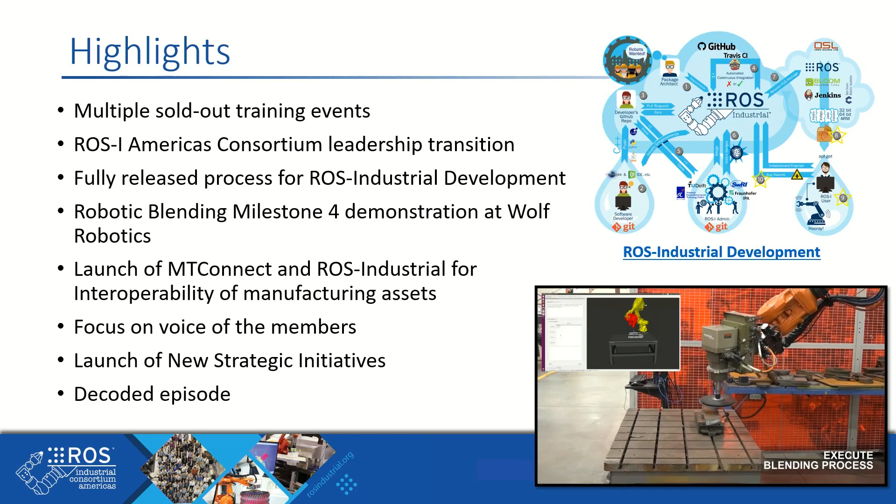All right, perfect. So we'll just step through a few highlights of some of the things we're working on. Training is also a focus for us. We're typically selling out events, so we could deliver more. I think it's something we have to look at carefully and figure out how to increase our bandwidth. We have a lot of interest not only from industry but from universities as well. So collectively, with Europe and the U.S. sharing best practices and content, I think we can go further faster. We did transition our ROS-Industrial Consortium leadership.

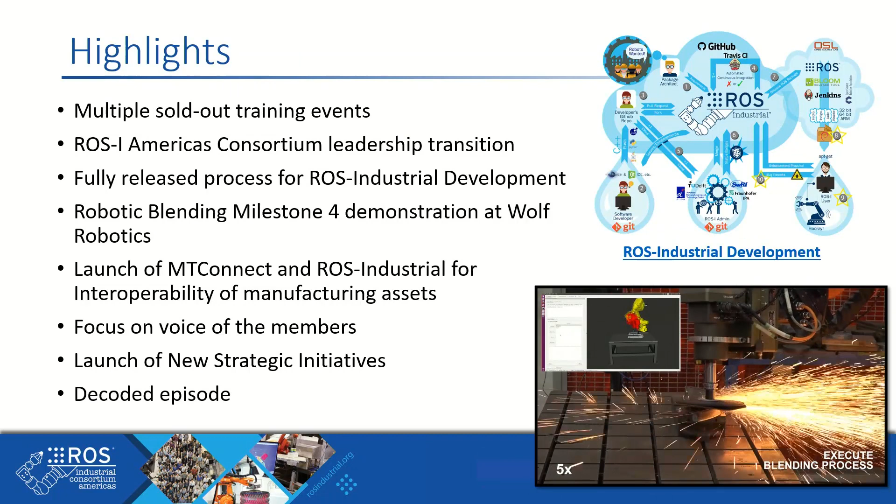Many of y'all may have met a couple of our former leaders, Paul Hvass and Shaun Edwards. They're working on a startup company that heavily leverages ROS capabilities, and we're excited to see where that goes, and it will be an example of something we can point to in the future.

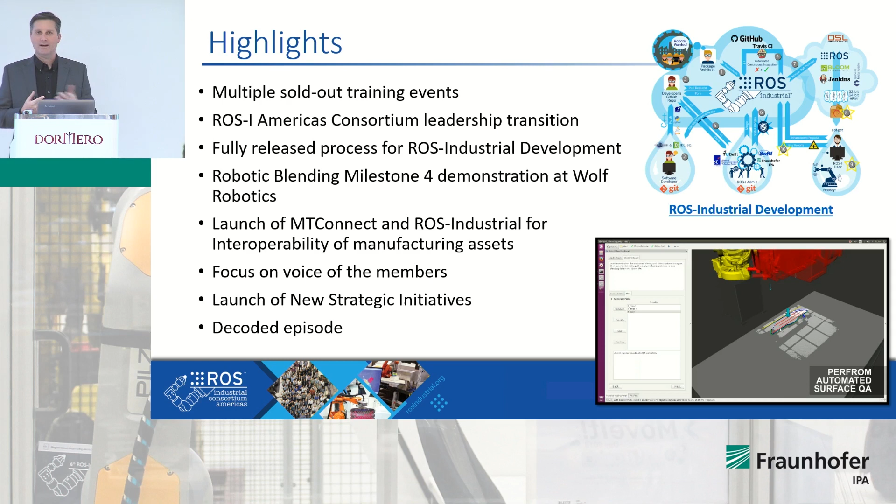In the meantime, our new consortium leader in the Americas is a person who came to us from Caterpillar, who was in their R&D group for advanced manufacturing. He was a heavy user of ROS in their labs, and so he's hit the ground running, so to speak, and really been a champion for what we're trying to do relative to ROS-Industrial and also the coordination with Europe and Asia Pacific.

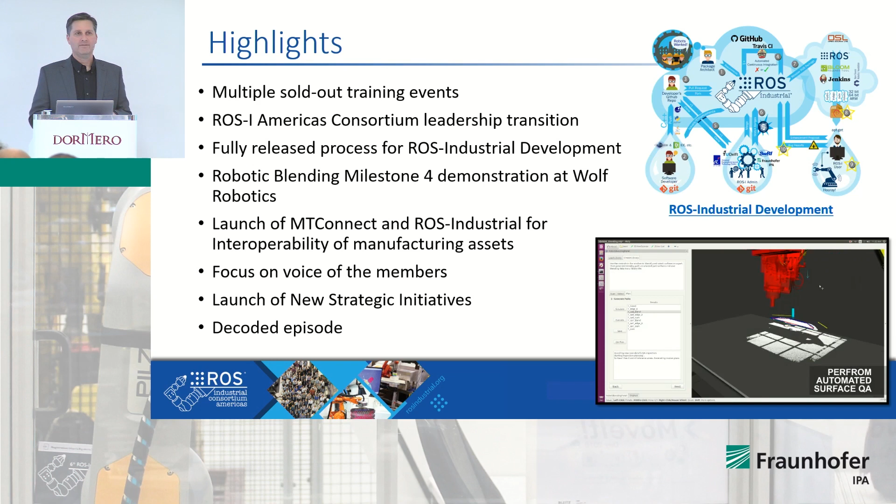Supporting Matt is also another gentleman named Levi Armstrong. He comes to us formerly from Bell Helicopter, and he's supporting Matt heavily on a technical role, while Matt is more on leadership and business. They regret they couldn't be here today, but I expect you'll see them again in the future.

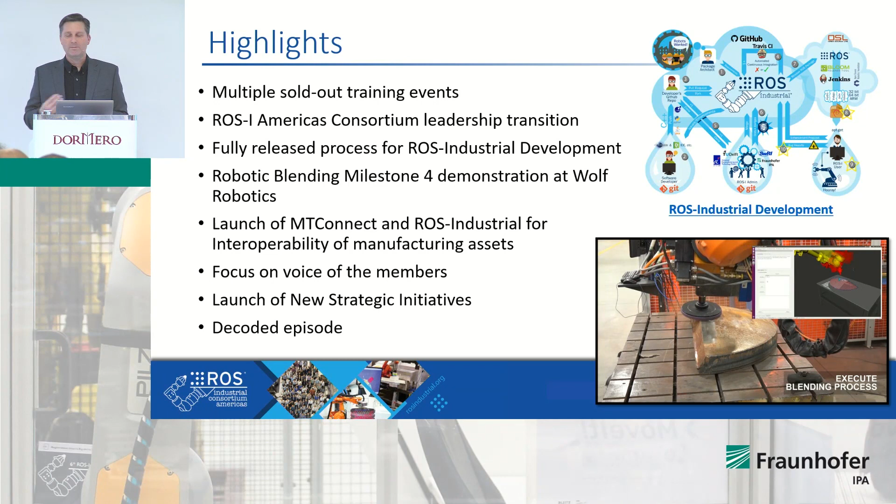One of the things we'll talk about here in a few minutes too is we accomplished what we call Robotic Blending Milestone 4, with a real tangible demonstration at an integrator facility. We're looking forward to rolling that out further. We've also been working on a bridge between MTConnect, which is a machine tool standard on communications and cloud connectivity, and ROS-Industrial.

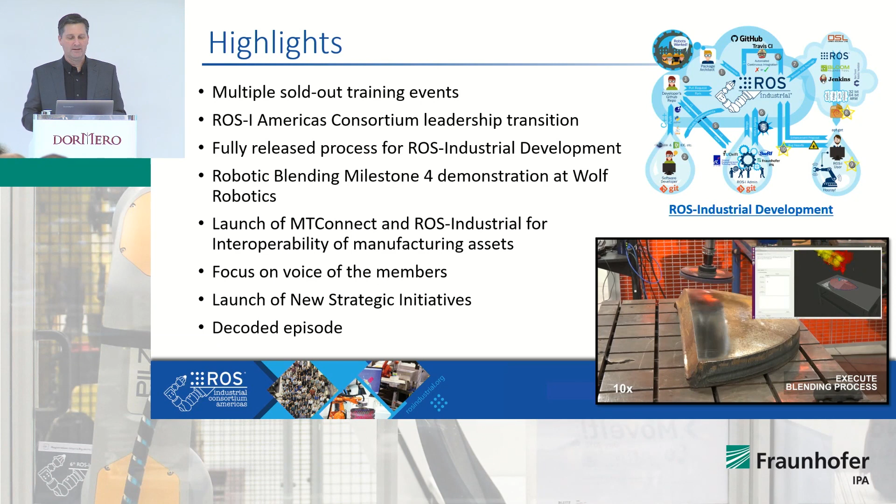We've focused on listening to the voice of our members, their priorities and interests, and how we start to solve those problems or challenges. Some of that is through new strategic launches of projects and capabilities. And then we'll touch base on the Decoded episode that just came out.

So first of all, voice of member. One of the things our consortium leader did when he came to us from his position at Caterpillar is he started looking at what the members are seeing as value out of ROS and ROS-Industrial, and then what we do as a consortium to offer some of the benefits back, in a stronger way, to those organizations and individuals participating. So I'm just going to highlight a few of the items we're focused on, not all encompassing.

Some of y'all may be aware that in the Americas we've launched recently what's called the Advanced Robotics for Manufacturing Institute, called ARM-I, and that institute is part of this network of institutes for manufacturing innovation. One of the things we're working on is how do we coordinate and complement this new institute, and one thing we're working on with them is how ROS-Industrial can be a central theme or maybe a repository for a lot of the good work that will come out of that institute.

We've heard from the customer that they're interested in access and alignment with universities, students coming out of universities. They need more skills in this ROS Industrial and ROS area. So we're working on coordination with universities on how we build that talent pipeline.

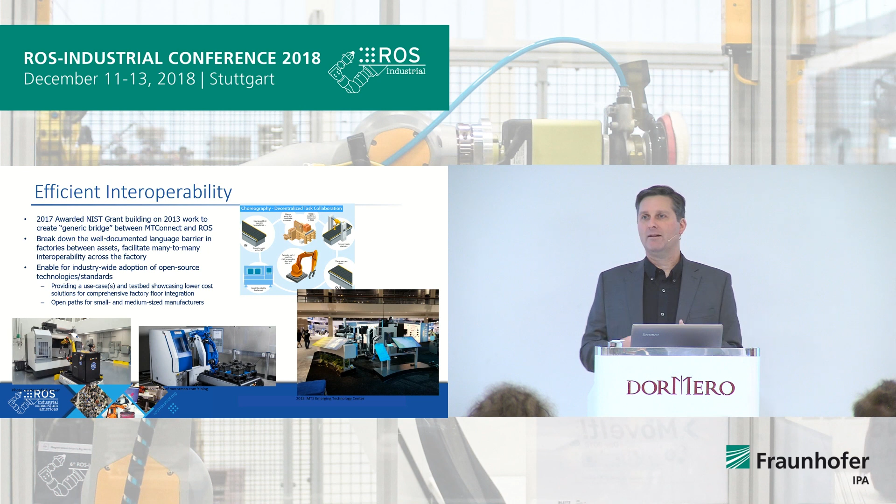And quick deployment. So one of the things we've worked on to help address some of this is looking at whether there are standards we can start linking to, and have a tighter coupling between ROS Industrial. MT Connect was initially machine tool connectivity for your machine tools. It's been expanded, as far as that working group, to be something more about factory connectivity, not just machine tool connectivity.

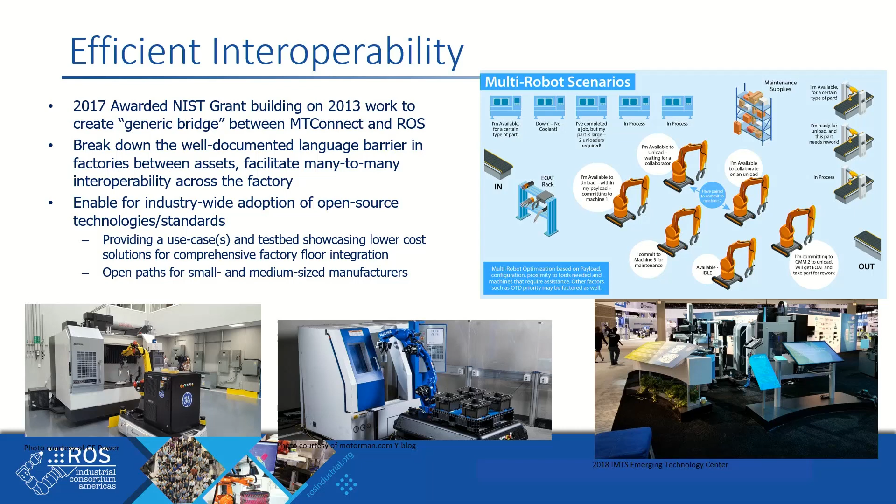So one of the initiatives we've been working on through the National Institute of Standards and Technology is building a generic bridge that links up to MT Connect, starting to offer broader connectivity between automation equipment and other things like machine tools and coordinate measuring machines. We start building out this capability of many-to-many connections on the factory floor between lots of different pieces of equipment.

There is an MT Connect repository on GitHub, and you can go there and see a bit more about what's going on. And on the blog, the ROS Industrial blog, you can read multiple blog posts about the progress on this initiative if it's something of interest.

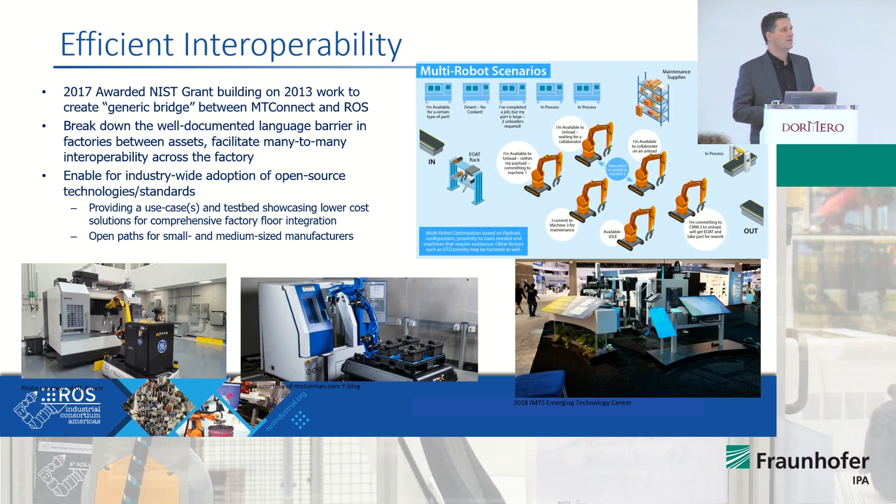Also looking at strategic initiatives, there's been interest from the Americas—I don't know so much about a request from Europe or Asia Pacific—to start understanding better who's doing what. So one of the things we've started to put together is this notional, I'd call it an organizational chart, but that might be too strong a term, this idea of identifying who does what within the ROS Industrial Consortium on the leadership, not only fostering the consortium itself and supporting the members, but also on different capabilities, different technologies, different core competencies within the software development framework.

So I realize that's like super small.

These slides will be available later so you can look at it with a sharper eye. So that's what this represents up here on the top right corner.

We're looking for others to add to that list. Coordinating with Mirko or with Matt Robinson are good ways to start looking at how to add yourself to that list, because you're shepherding a core part of the capability within the ROS Industrial Framework and want to be responsible. We're looking for that kind of initiative, that kind of volunteer.

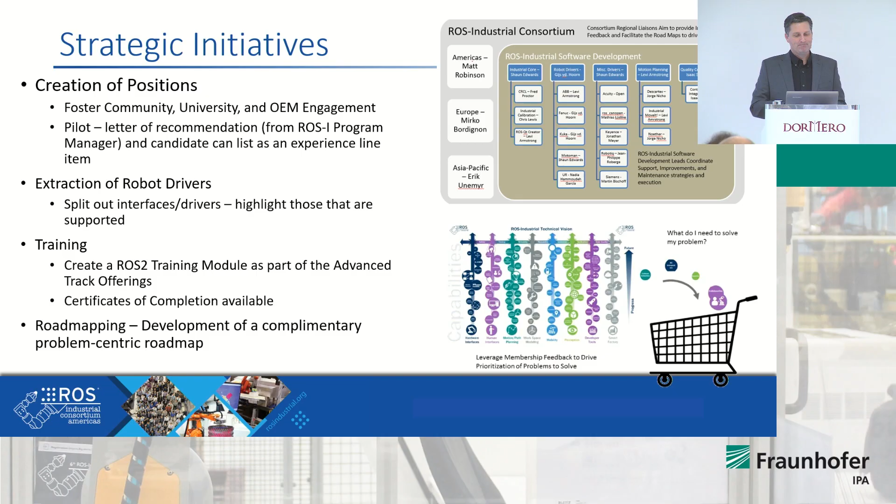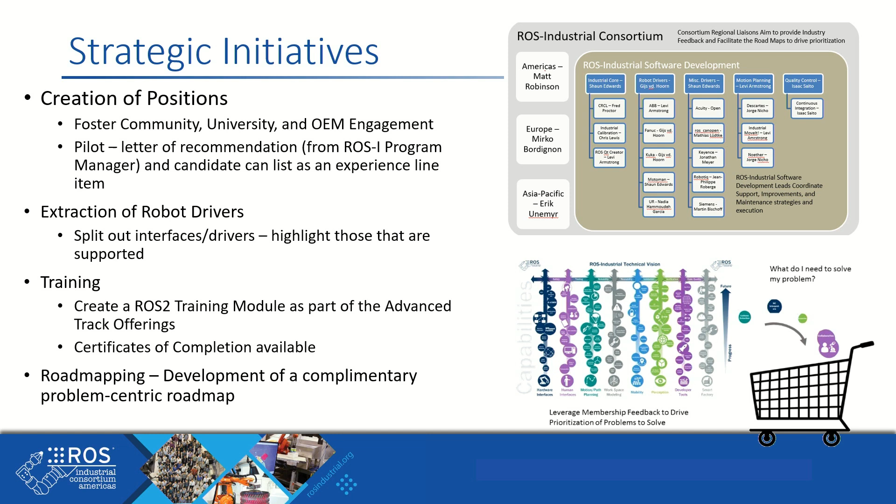The other thing is that we're looking at highlighting in a special way those drivers, those original equipment capabilities that are tighter coupled to ROS Industrial and to ROS. So basically recognizing that there's something maybe supported by an original equipment manufacturer versus something somebody put up on the web that maybe isn't very mature. We're looking to highlight those with more maturity in a special way.

We also recognize it's time to start moving towards a ROS-2 training module in the Americas, and we're looking forward to leveraging what's occurring in other parts of the global community relative to ROS-2 training as we begin to prepare our journey on that as well.

The last thing I'll mention on strategic initiatives is there's been a request from industry: the roadmap's great, has anybody seen the roadmap for ROS Industrial? It's on the website and also in a brochure. A few people said okay, I think it's great, it's got a lot of capabilities and it's really well laid out.

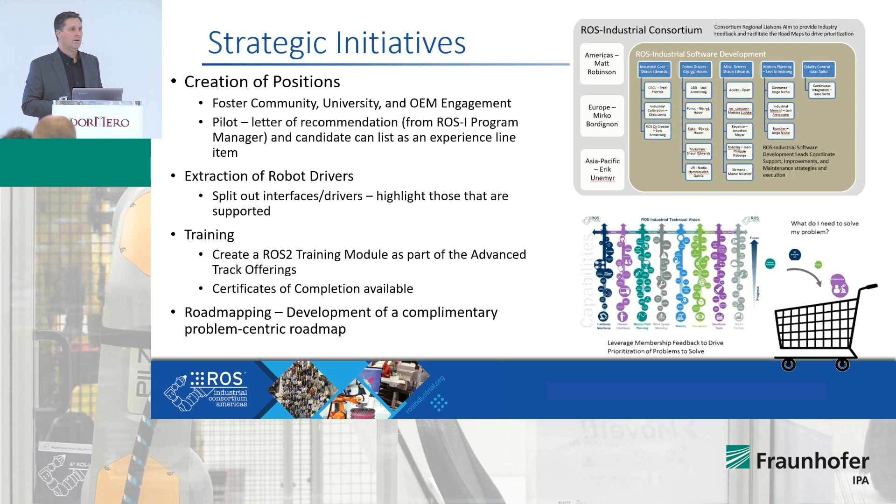But the challenge industry has had is that really they want to try to solve some problems. So if I want to solve a problem, I want to grab different parts of this roadmap and put them in a shopping cart, so to speak, and be able to use those. So as we think about the timeline and priorities for the different elements on the roadmap, it'd be good to also think about the problems industry is trying to solve relative to those elements and their priorities on those problems. It's a different way to look at the roadmap. We're starting to craft that viewpoint over the course of this next year, so look forward to seeing more about that.

Community engagement also remains a priority for the Americas. There's items as far as events, too numerous to mention. I'm just going to highlight a few that are of interest.

One is that we had a number of requests from the startup community asking to create a special category for them within the consortium. So within our agreement, we did add that as an opportunity for startups to be better recognized and also have a better opportunity to come in and engage with the consortium.

We've also been fostering what I would call meetups, which is basically helping organizations or individuals understand how to bring together a community of interested, like-minded roboticists in their area to try to create some synergy within a certain geographical region. We're also doing that in San Antonio in collaboration with the Plus One Robotics staff, Shaun Edwards, helping us with that too.

World MoveIt Day was one of our highlights over the course of this last year. We loved participating in that, seeing a lot of the great progress, and we were inspired by it, so we launched the World ROS-I Day. Over the course of about 22 hours, we solved about 31 different specific issues that were recognized, so we call that a success. We're on deck for keeping that alive and doing it again, so look forward to announcements on that in 2019.

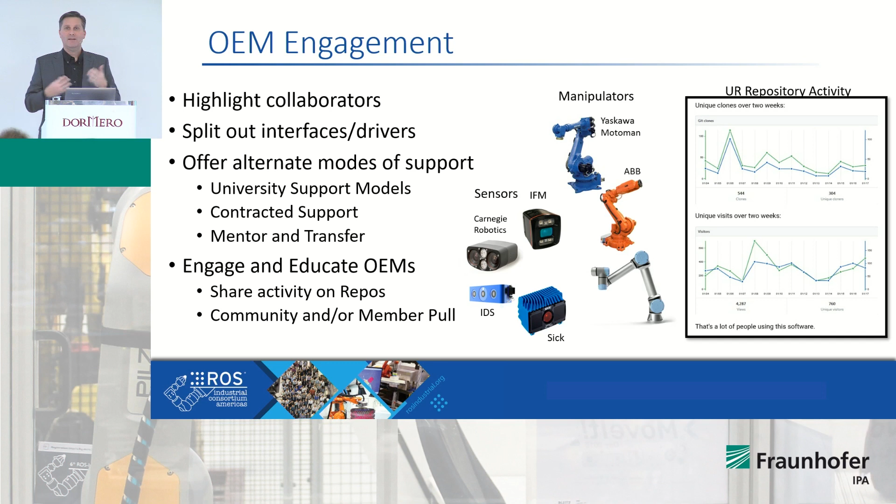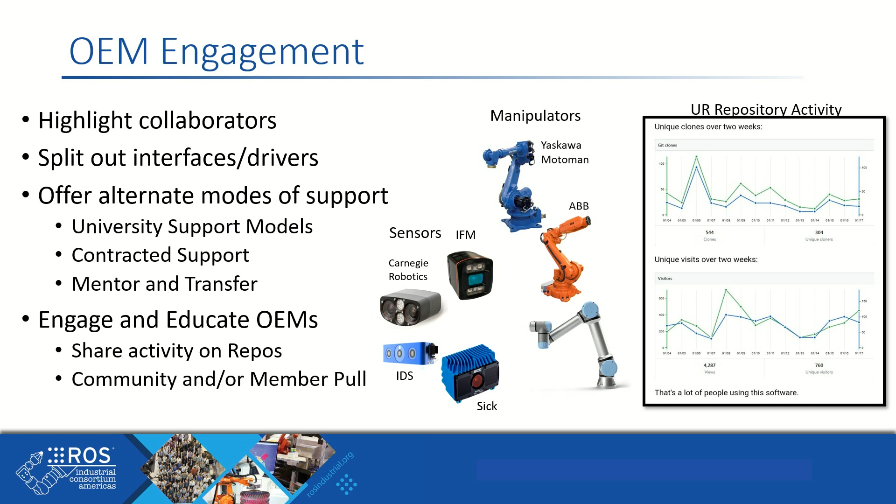One of the things we need from the community is to share that with your preferred robot provider or sensor provider, and make the request that they support and build their own driver and connectivity to ROS and ROS-Industrial. That's another thing we're working on this year, coordinating that better to put emphasis on it with the original equipment manufacturers.

This last year in March we had our annual meeting, similar to what you see here. We had a great group of the community in the Americas come together, solving problems, talking about initiatives, and really networking. By the end of the event it's inspiring, similar to what we find here.

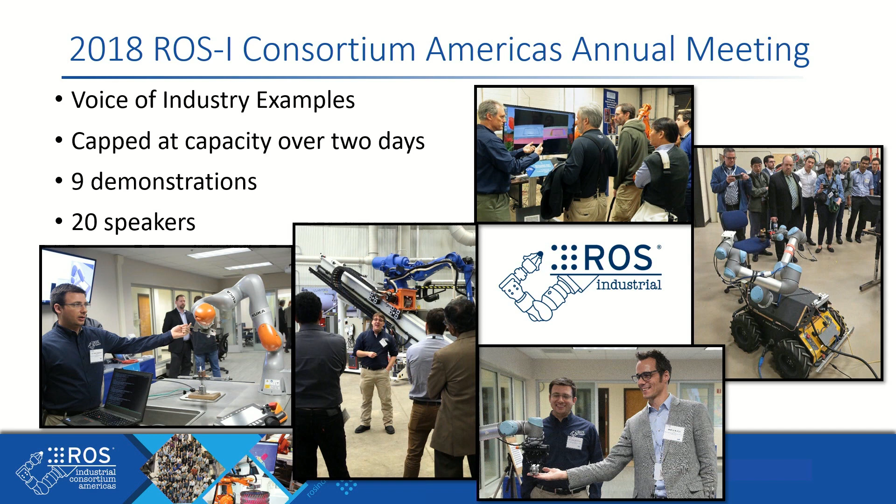Much of what we had was voice of industry examples - how industry is using ROS-Industrial in real ways. Boeing talked about how they're using it within their organization, where it works, how it solved problems. I'll show an example from a couple others. It was really inspiring to hear about initiatives that aren't as publicly highlighted, but within the consortium and community meetings we're starting to hear more about.

So these are just some pictures from the events. We had 9 different demonstrations and about 20 speakers over the course of that event.

One example I'll highlight came from Bastian Solutions, where they talked about how they were able to go from some concepts and ideas to something they put into an expo and then onto a factory floor much more rapidly than if they had homegrown everything from scratch. You can see on the screen some of the specific things they used from the ROS community that enabled their work.

Some other things they took advantage of as part of being part of the community was getting their staff trained up on what ROS is and how it works, and how to get their team working together collaboratively. Through the training activities they participated in, they were able to do that. They also appreciated the modularity of the different systems, components, and hardware they were using, and obviously the accelerated timeline to get something functional.

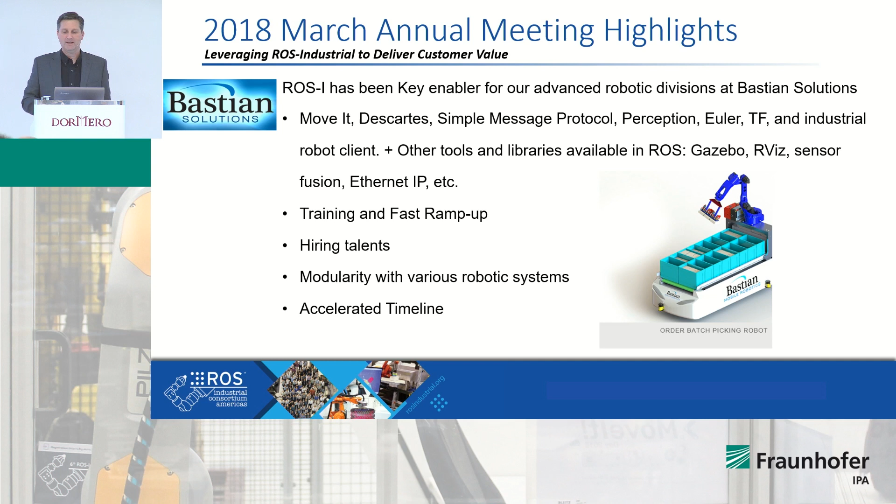So here's the example of what they put together, which is a mobile manipulation capability. This was an expo demonstration that they put together.

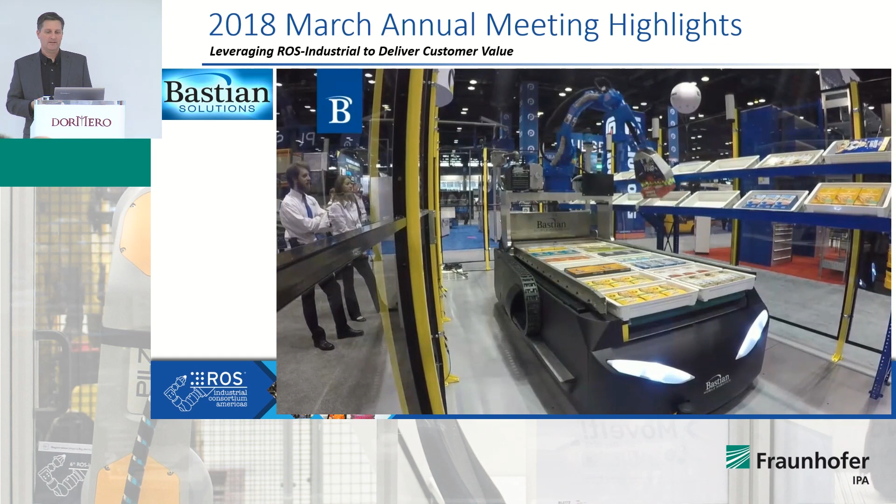This is an example of a picking operation. You prepare it into the bed of the system, and it also has a conveyor on it so it can be moved off, kind of in a warehousing operation.

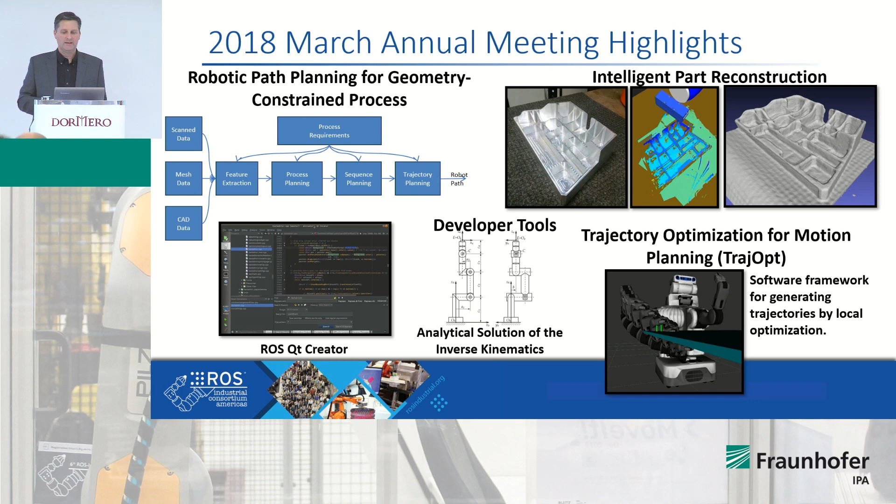Some other things we highlighted, part of a request from industry, is to tell us more about tools and capabilities that we can use that maybe we don't know about, or could get more information on. So we had a series of presentations on some of these things.

I'm not going to go into all of them here, I'll just list a few as examples. There's more information on each of these on the ROS-Industrial website under the blog posts, and also in the repository. If any of these strike your interest - I know there's a growing community of users of the Qt Creator, and there's been interest too in intelligent part reconstruction, like how we build a higher quality 3D map of shiny parts or things that are generally hard to process in 3D. Lots of good stuff.

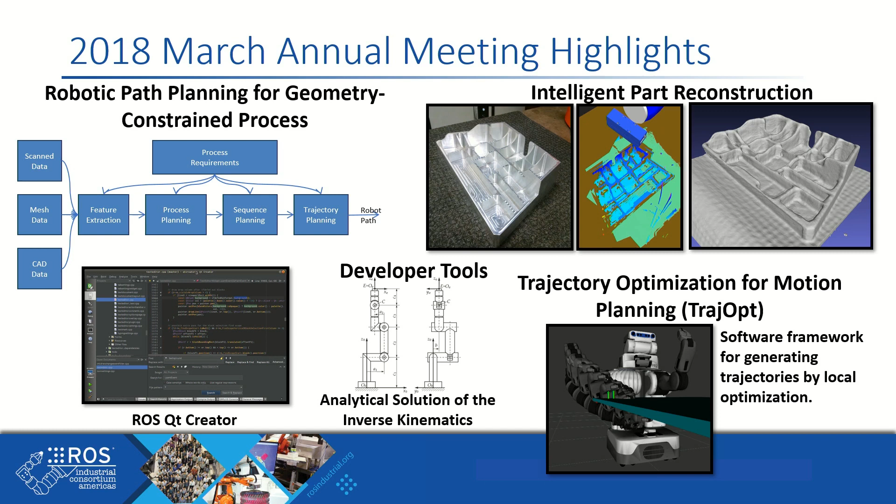Continue to visit the ROS-Industrial blog site for staying up with the latest in what's emerging on capabilities and tools.

One of the other things we highlighted too in the annual meeting was the blending results. We were excited to see that the industry wants to move forward on a Milestone 5. We've completed Milestone 4, which was demonstration of the blending capability at scale on real parts that came from manufacturers.

So what was this blending capability? Essentially, you take a part, put it in front of the robot, and have the robot sense or automatically scan the part. The operator then identifies the surfaces from that scan that are eligible for blending, grinding, or polishing. Once those surfaces are selected, the paths are automatically generated, and then the robot goes and does its work using those paths.

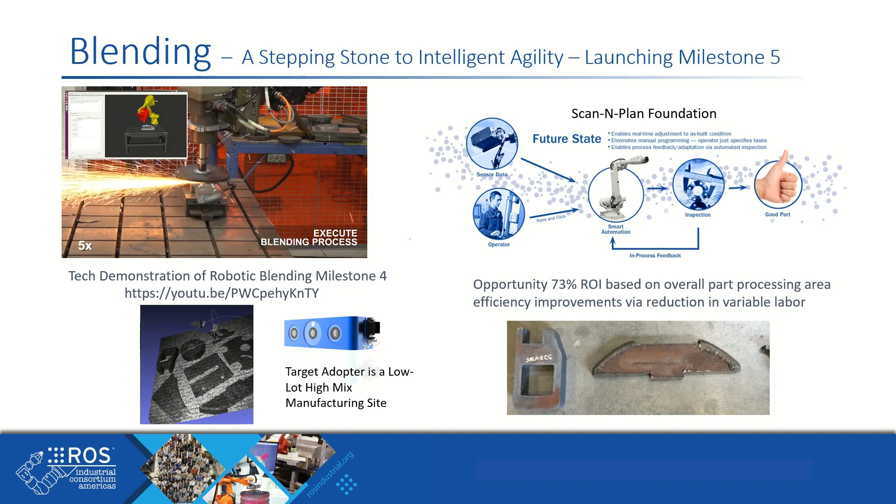There's a simulation component to that, so the operator can validate that the paths are appropriate if they wish. We also have a quality assurance inspection piece that goes hand in hand with this.

Part of Milestone 5 would be to further build out the integration with the quality assurance component, and there's also some interest in having elements of this with cloud connectivity. We can share more about Milestone 5 if anyone's interested—speak to me after the meeting and we can see about tracking that as a focused technical project.

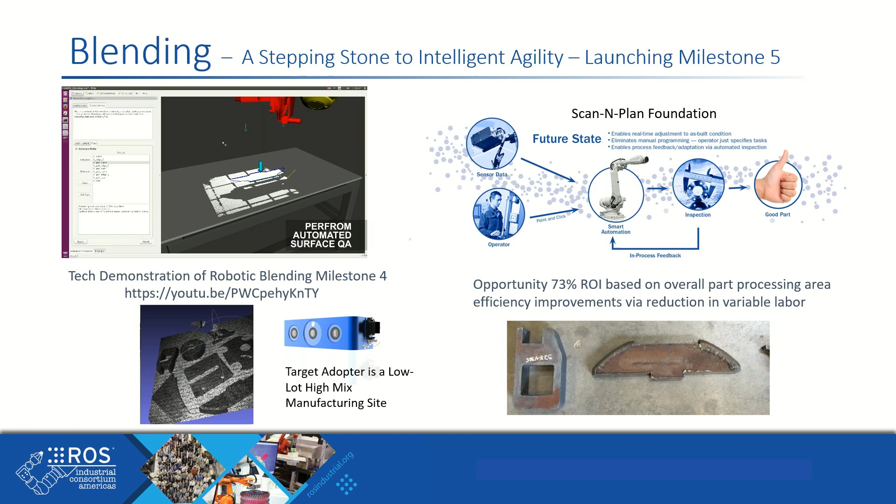I have a few more slides on this one. This is something Mirko asked me to elaborate on a bit more, but it was also presented at the annual meeting by the Air Force Research Laboratory.

The Air Force Research Laboratory has a manufacturing technology program, and part of that program is to create capabilities that are not just useful for the Air Force but broadly applicable across the aerospace industry. This is an initiative they launched with Southwest Research Institute, Boeing, and the National Center for Defense Manufacturing and Machining collaborating together.

It's less about the robot and more about the software. What we're working on is taking the capabilities we've developed in this scan-and-plan domain and creating scan-and-plan for X, where X could be painting, sanding, non-destructive inspection, blending, or other processes—essentially an underlying framework where we bolt on process capabilities. That's been the focus of the initiative.

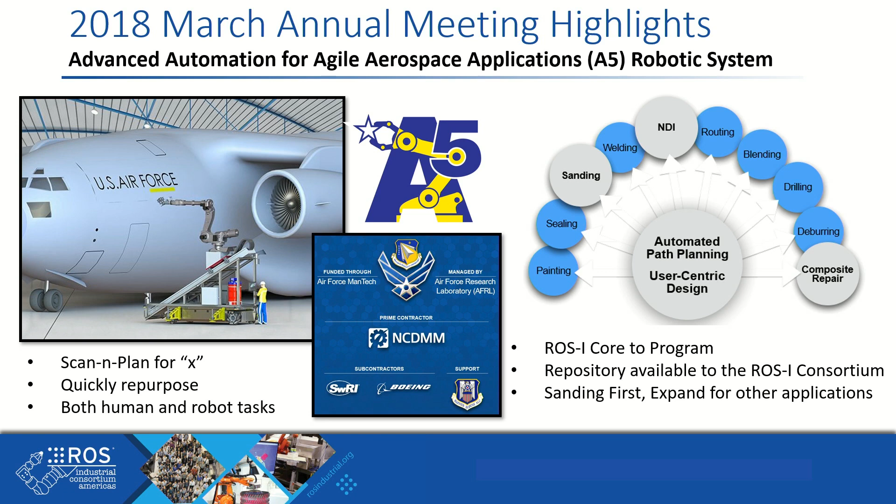As part of the initiative, we also got to build a really big, cool robot, which was exciting as well. And ROS-Industrial is at the core of this program as the underpinnings for how we're accomplishing this work.

The first focus for us has been sanding operations as a demonstration capability—the first process we're bolting into the framework. The repository is available to ROS-Industrial Consortium members at this time.

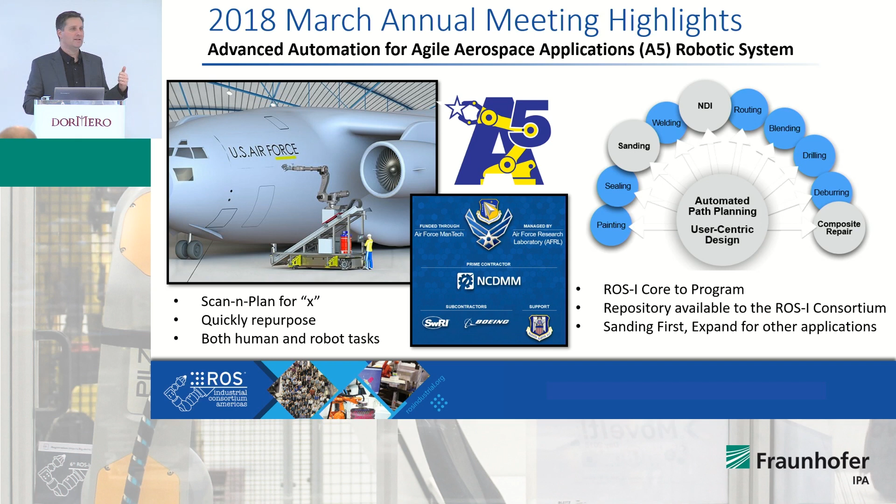The platform we used is off-the-shelf components integrated together—again, it's more about the software framework approach. So how did this work?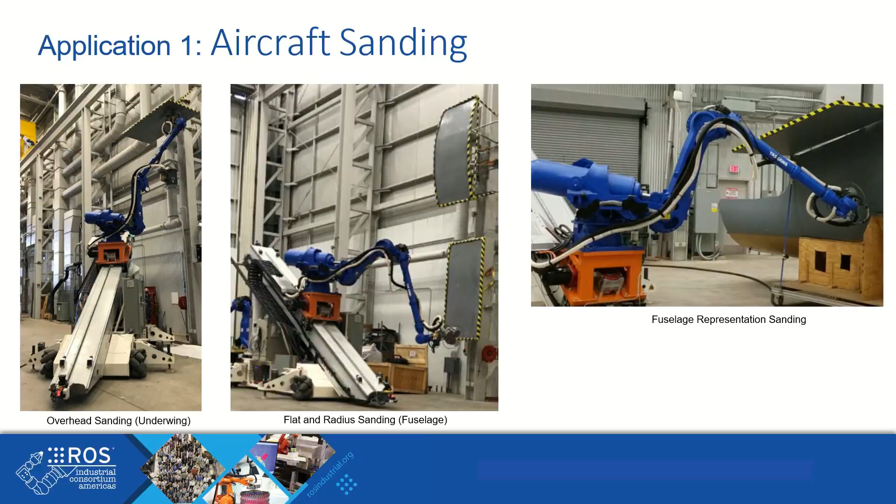We have a system where an operator positions it close to an aircraft. Once it's close, we have an ongoing active wide-area scanning capability on the platform, building a 3D map of the environment the mobile platform is working within.

The operator can then select what region of the aircraft they want to sand, since sanding is the first process, though it could be others. Within that region, paths are generated so the robot can go do a fine or detailed scan of that area.

And then once the detailed scan is done, the process ensues. The process in this case was provided by Boeing on the sanding part, and it's a closed-loop process by which it's also monitored over the course of time. Our contribution at Southwest Research and the ROS-Industrial team has been more around the 3D data processing, the path planning, the underpinning, the framework that we're working with.

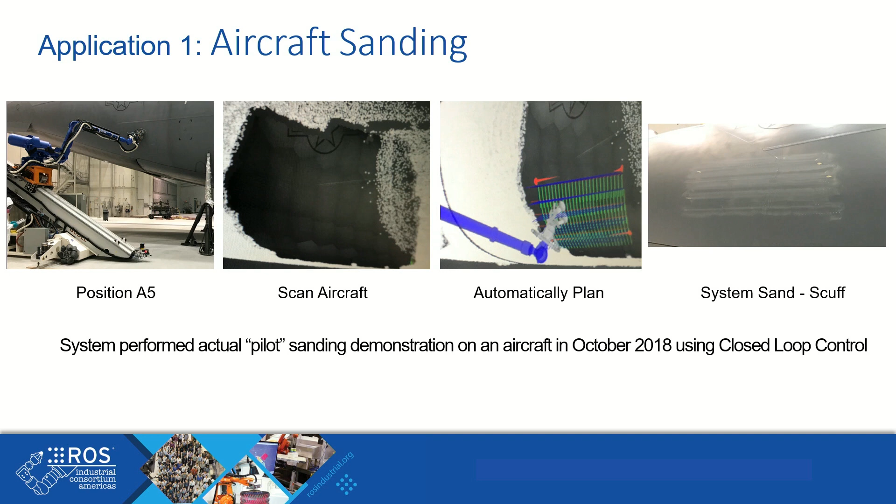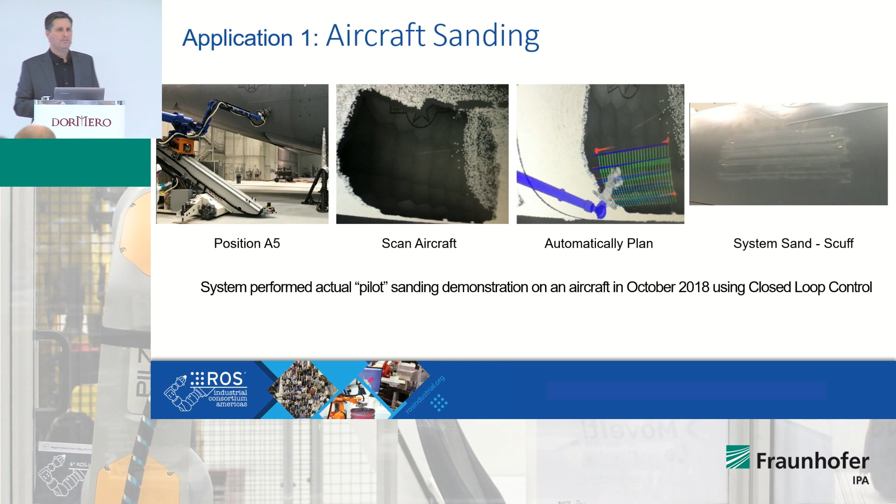And then the last part of that step is actually to do a scuff sand. So we demonstrated this on an actual aircraft. I'm going to show a video, but we're just going to stop streaming for a few seconds while we play that out.

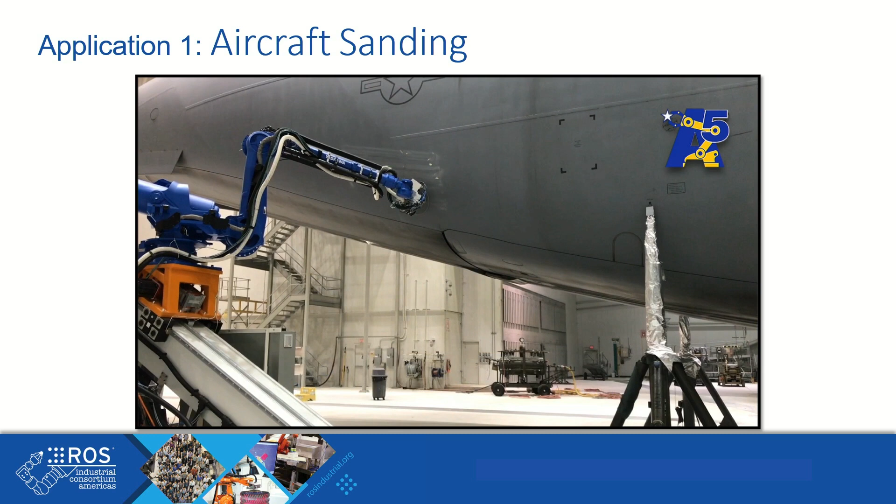So this is on an actual aircraft, and this is after the scan where the robot is going through this process of automatically scuff sanding the aircraft. I just have a brief few segments of this video to share, but wanted to show you that we've moved to the point where we're working on an actual aircraft with the ROS-Industrial Scan and Plan for X framework. So we thought that was really cool, a lot of excitement around that, and interest from the aerospace industry in general on seeing that progress.

I also wanted to highlight something else that occurred. I think I'm going to transition a little bit and start talking about this global collaboration that we start seeing occur as a result of this community that we're all involved with.

If you haven't seen it yet, there's a new Decoded episode that Microsoft put together, showing a collaboration that we supported on the ROS-Industrial program with Microsoft and BMW this last year, where BMW started looking at how to do multi mobile robot coordination for assembly and logistics. In this case, ROS-Industrial Americas was able to support evaluating different simulation environments and engines, and the ROS-Industrial Consortium in Europe was able to provide additional capabilities and support for navigation and tech support. So great collaboration.

The video is put together nicely and showcases ROS-Industrial as something that's useful for industry. So I encourage you to go check that out. It's on the ROS-Industrial blog site, but you can also Google for it.